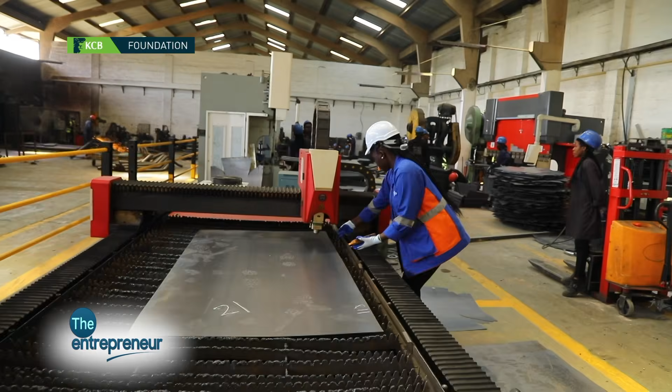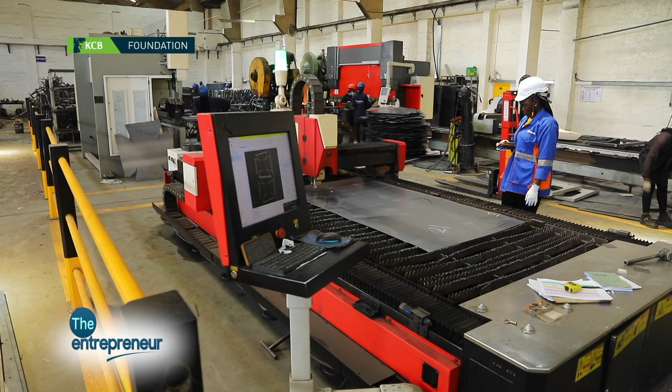Back then, when I was still a student in high school, we studied in a very different environment, and I wanted a passion, something very different and unique from what we knew. So after high school, I studied electrical engineering, and after campus, that is when I came to learn more about engineering. That is why I started majoring in the engineering side of fabrication.

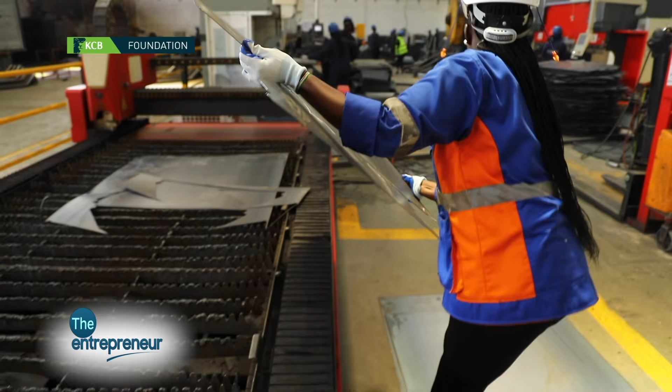After applying online through their website, I was shortlisted for an interview that was to be done at Protec. That is where we met with the KCB team that interviewed us. We did the necessary papers and questions, and after that we were shortlisted for a second interview before placement for the class.

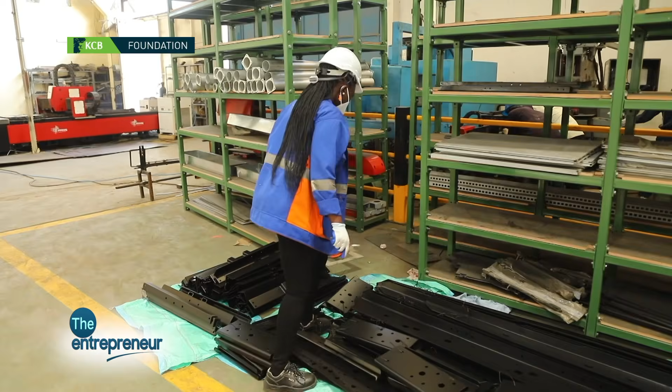We went for class. We were scheduled for 3 months of class and then 3 months of attachment or field work. So that is when I studied. We went for the 3 months class and studied very many things.

The classes actually started almost immediately after the interview, and they gave us the duty or timetable on how the classes would run. You had to be punctual, to know when and at what time you should be in class. So after that, in the next week, we started the class, the introduction, so you came to know about whatever you wanted to learn - the basic things, the PPEs to be used, all the necessary things to be done.

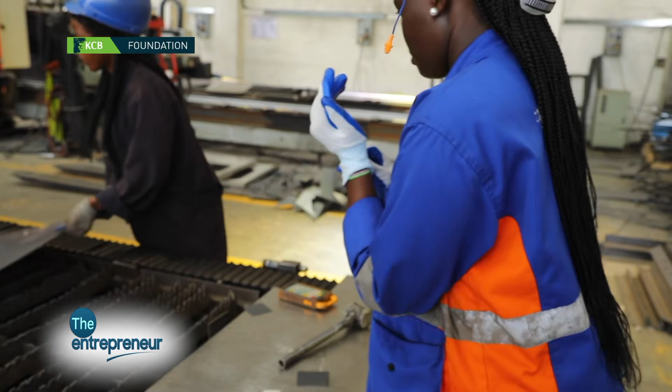For CNC, it is pure engineering. It is not hard, but it wants you to be determined. For that, you need to be passionate, you need to know whatever you want to do, because the field we are in is a bit gender biased. For a lady to venture into this work, it is very competitive.

For class, we had classes for practicals, so it is not a new thing when you are coming from an attachment. It is not new because in class you have already gone for practicals here and there - you already know the components of the laser, you already know the safety measures and precautions to be taken, and also whatever you need to do when there is an emergency.

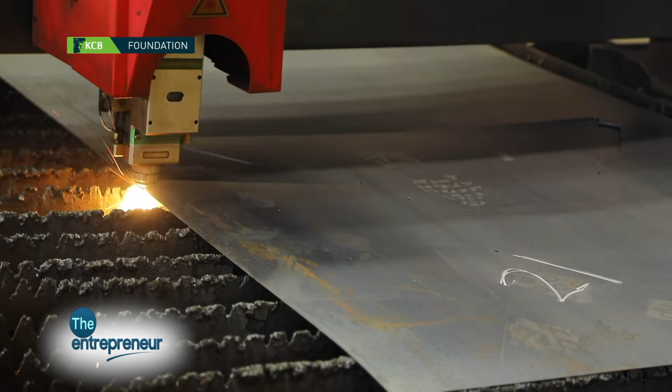But the good thing about CNC lasers is they have sensors. For example, at the laser, at the nozzle, there is a part at the bottom - when you touch it, it jumps, it has an alarm. So it can't cut a person, it will only cut the material, like there's a wood router or laser that only cuts metal.

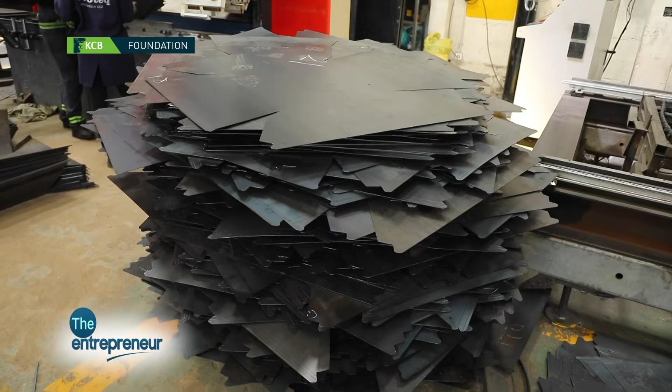For example, I did laser and plasma, but I majored in laser, CNC laser. CNC laser is a computerized laser, not the old kind. This is something that you can control from this panel.

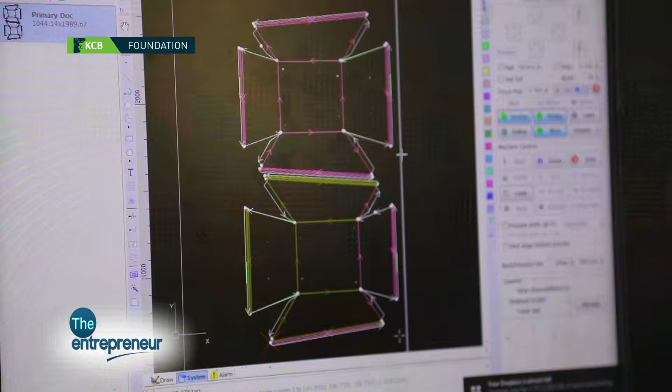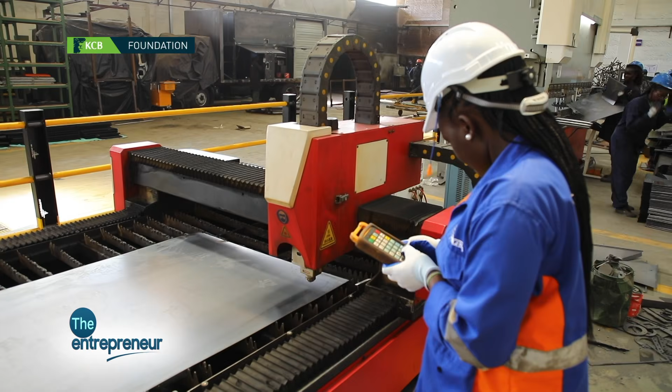And it will cut. The laser has a lot of things - it has a laser source, which is the main component, it has the nozzle, the rails, the chiller, the stabilizer. Those are the things that make up a laser. Also the motors - all the parts of the laser have motors at both sides.

So that was in theory. From then, in class, as much as we were going for practicals, that was just an introduction, seeing how the laser is. Just looking at it without touching, you have to understand it first. If you see it, you can be able to identify that this is a CNC laser, not the manual one.

For the classes, they would run during the week, but for proper understanding, and for people who wanted to know more, you have to create your own time for better understanding and to be able to capture it, because for the 3 months you go to class but you also need to generate your own time, dedicating yourself to understand. It is wide but not complicated, so to master something you need to create extra time to grasp anything that needs to be cut.

So after classes we did the exam. There is an exam after that. We did the exam, then immediately we went for the attachments. For me, I was placed at Protec, so I came to Protec.

I started as an attachee here at the laser. So that is when you come to practice whatever you learned in class. Yeah, so that is what it entailed.

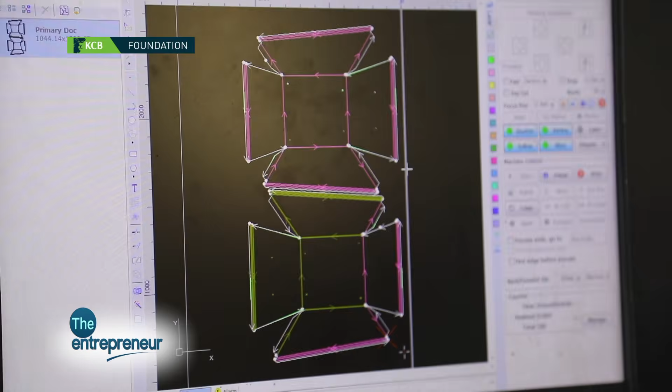But in detail, for the laser, we have the design, so how the process comes. After that, as much as we are given a bit of design, we learn about design, but the basics - the things that you can be able to do or use here. So we do the design a little, but I did mine with SolidWorks. Design is something I really love because it's my passion. After I started, I realized this is something I enjoy doing.

Design can sometimes be complex, sometimes simple, depending on client specifications. You can get a client who has come with a certain design, so you have to understand the design first, get a sketch, get all the right dimensions, and then we sketch. After you've done it on the computer and everything is okay and approved, then we send it to the next process, whether it's cutting, bending or fabrication.

My name is Joy Waroi. I'm a designer here at Protec Automation.

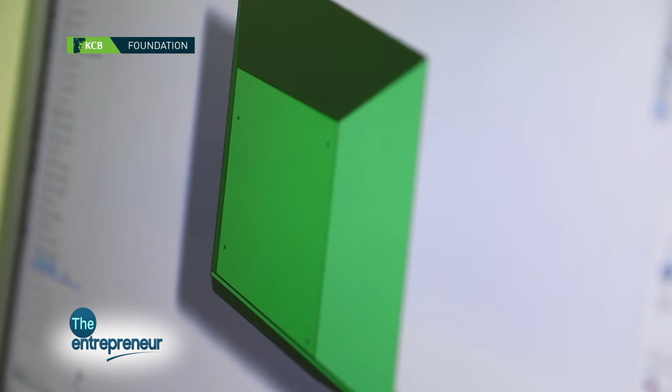I did agronomy in campus. After I completed, I went for a job, but I wasn't really satisfied because deep down I wanted something different. So at one point, my friend told me about the KCB Foundation, 2jiajiri Foundation, and sent me a link to apply, so I decided to try my luck. After I applied, I was selected, we went for an interview, then a 3 month course, then an internship, no, attachment, sorry. After that I got a job here at Protec because I was attached here. My boss decided it's okay to retain me because I had worked hard.

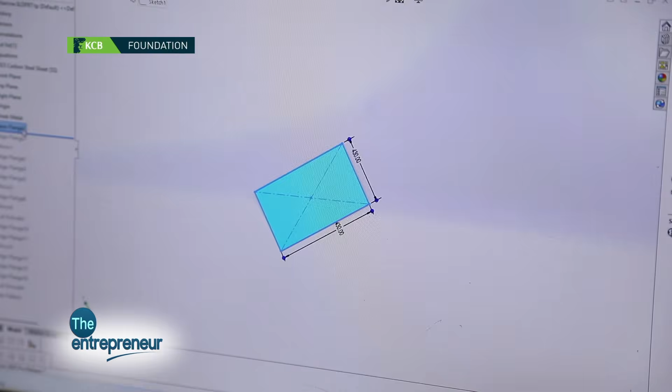So for example, if a client says they want to design something like wheelbarrows, this is what I do. We make sure we do our designs according to the client's specifications in terms of dimensions, the height, length and everything. Then once we do that, we make sure every stage of design is approved.

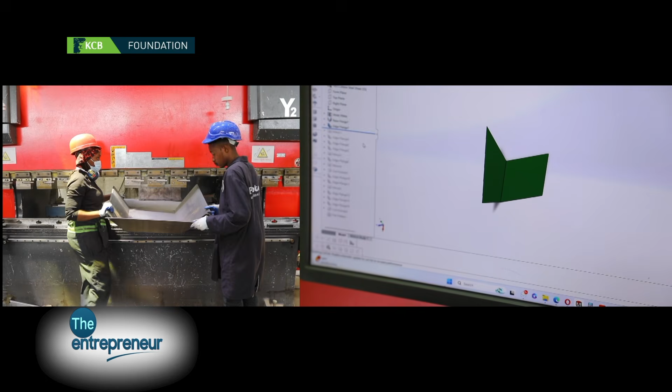Now as you can see, this is how it will appear step by step. Every stage must be approved and tested, maybe through prototyping, to make sure it aligns with all the specifications given by the client, to make sure there is no wastage of resources and materials.

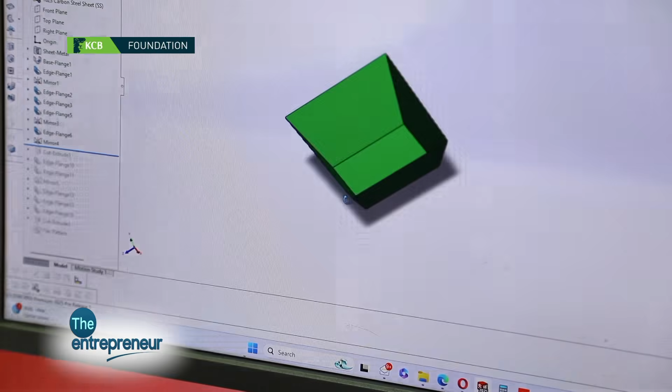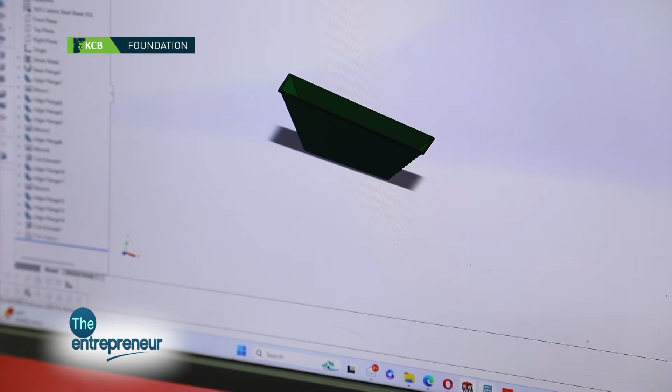And then finally we have this for the bowl, and then we have other parts. This is what we send to the next process because we cannot send it while folded. Once it is taken to the laser, it gets cut and bent, and once bent it becomes like this. So once it goes through fabrication, assembly and painting, this is what it will look like.

So after the design, you transfer the file you have designed from the design room or from the computer to the laser using a DXF form. There is a form that comes here, you transfer it here in DXF. So that DXF is what the laser can understand, that is the language with the laser. So when it comes here, when you open that file, the laser is able to run everything using the diagram in DXF form.

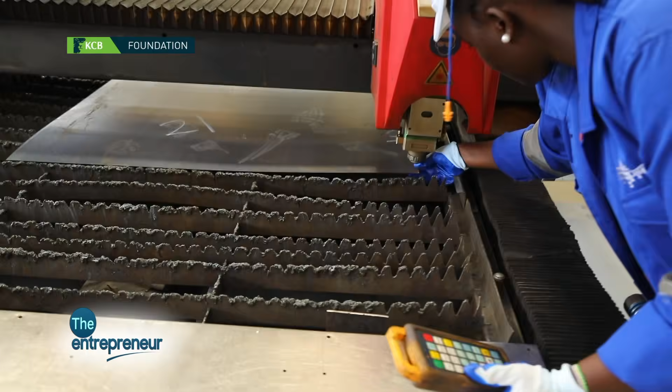So that's when you can start the preps for the laser before you cut. Before you lay the material, you have to inspect the machine to see if it's okay, you have to check the nozzle also. There are critical parts like the nozzle, there's a lens on the head too. Your lens can affect the cutting. So you should be keen on the parameters you use.

We call them parameters here. So you need to check first that the nozzle you're using is correct, because we have variety. There's mild steel and there's stainless steel. A nozzle used to cut stainless steel is not like the one for mild steel, so you have to change it. Also the thickness of the material matters. For lasers like these, a thickness of 4mm you cannot cut with a 3mm nozzle. Every thickness has its own nozzle.

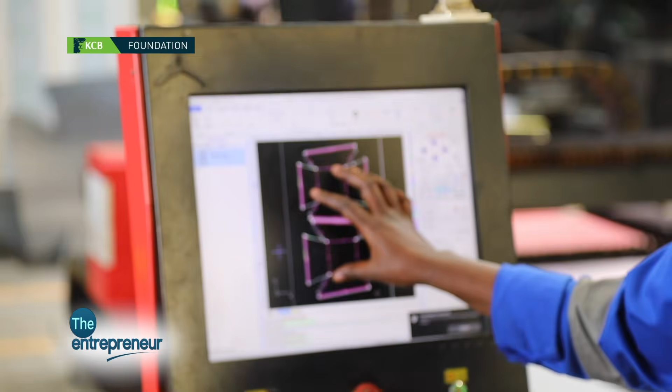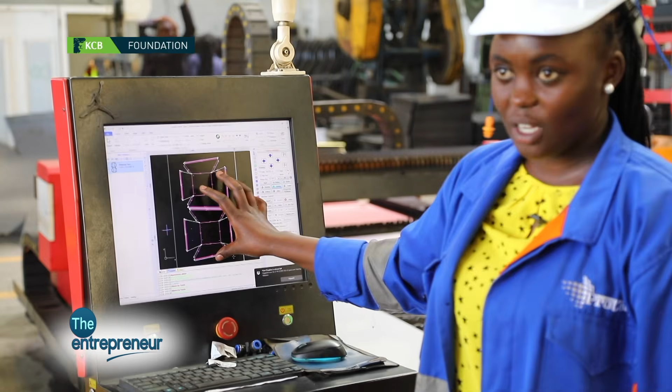Okay, after we receive the DXF form from design, it comes here, we open it as now it's a DXF form. So here now, for example, we are cutting the wheelbarrow bowl, because that's what we're cutting. So we take the materials, we place them here, we open the DXF here, which is here because it's already been sent from design. From here you do the necessary, you nest it as it's nested, you frame it. There are things that happen, there's framing, there's nesting, there's setting the reference points, those are all up here.

So you feed the correct information and then you go back to the workpiece. After that you have to frame it to minimize issues, because the laser cannot control where it cuts otherwise. You have to put the workpiece or the sheet in its correct place. You need to frame it, make it centered, don't let it sit badly because it can cut outside. So after you put the workpiece on the floor and everything is correct, set correctly, that is when you start.

You can either use this control panel on the screen, or we have also the machine remote, to help with movement. You have to inspect the parts being cut as you are cutting, because maybe something has gone wrong and it won't stop, so it won't run away for no reason. So you have to have a movable remote, you can control it from anywhere. You can pause, you can put an emergency stop if there is a problem.

The command the laser takes is from the DXF form. How it is designed is how it cuts. There are no alterations made, it's just that you can change some features that fit the laser, like parameters, so that it can suit whatever you are cutting. The thickness, you have to inspect the thickness, the nozzle you are using, the type of material you are cutting. Yeah.

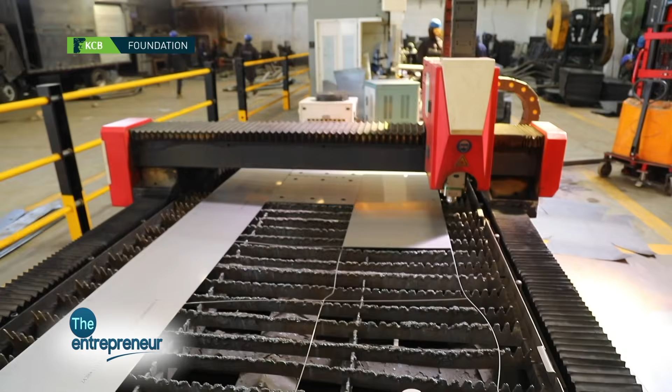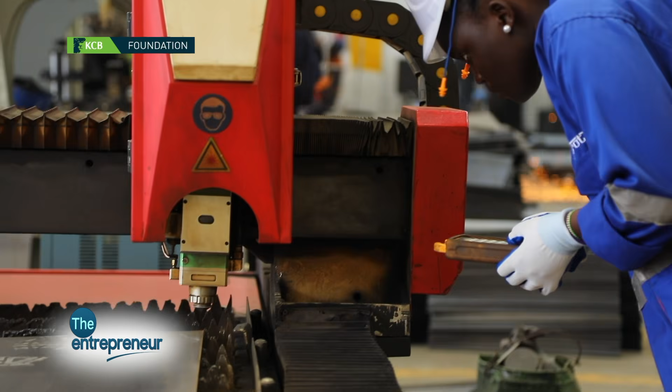It has sensors like these. These and that one are limit sensors. Also the one holding the Z-axis. This is the Z-axis, you see, this is the Z-axis.

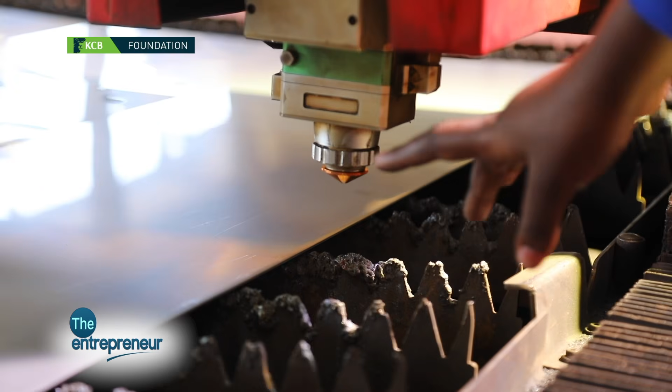What else? We have the motors that drive it, both. Also there are motors for this control panel down here. We have the laser source over there at the back.

Now that is what we call the laser head. Without the laser source, nothing can be performed. We have the stabilizer for the electricity, we have the chiller, and the remote is also part of it. We have gas - depending on the material you are cutting, that determines the gas you will use.

So after cutting, for example the wheelbarrow bowl, there are parts that the laser cuts and parts that get engraved. For the engraving, that is the useful part that bending uses, so bending will bend as per the engraving or the bending lines.

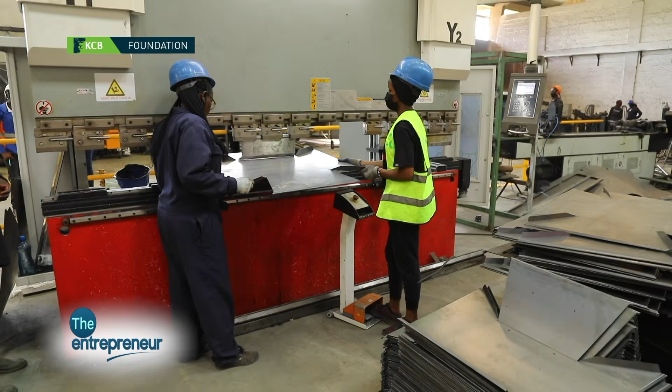The same way we are given the cut forms from the design, the design team also gives bending drawings, engineering bending drawings. So for the bending, they will understand the drawing using the bending marks - where there are angles, they will bend as per the angles on the drawing, the bending engineering paper. So that's where bending comes through.

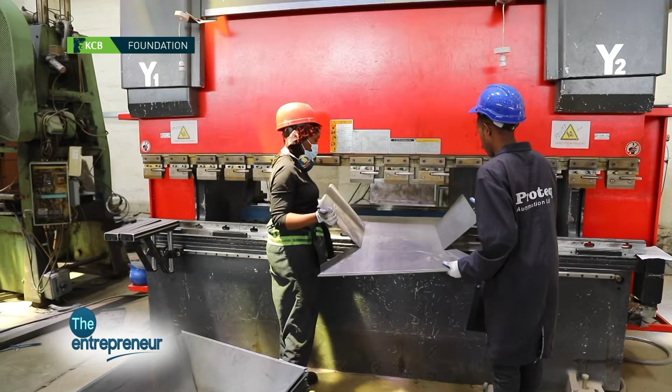Challenges in this field - definitely there are challenges. One challenge is this field is dominated by men. But it's interesting when a lady is here, you argue with them because this is what we are doing. It's not a soft job, it requires you to be tough, it needs passion and understanding.

Then other things are the engineering aspects. So you have to bring the engineering part into your mind, knowing that this and this is what is done.

But the interesting part of this is also that from a plain sheet, like a plain sheet, you can develop something useful in society, very useful. So you can take something like that wheelbarrow, and that wheelbarrow becomes something very useful that impacts people's lives - and most of the things we see, we made them there.

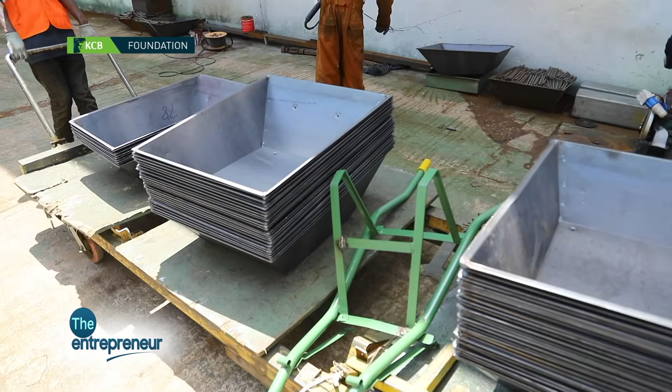So everything, most of the parts, even dustbins, those parts we make. Also for cars, we also make some parts. So it is very interesting.

It is actually satisfying when you know that if you see a car somewhere or you see a wheelbarrow, you know I'm behind it. Even if you see the whole process, you know my hands passed through here, or my mind was behind the design or the technical part of it.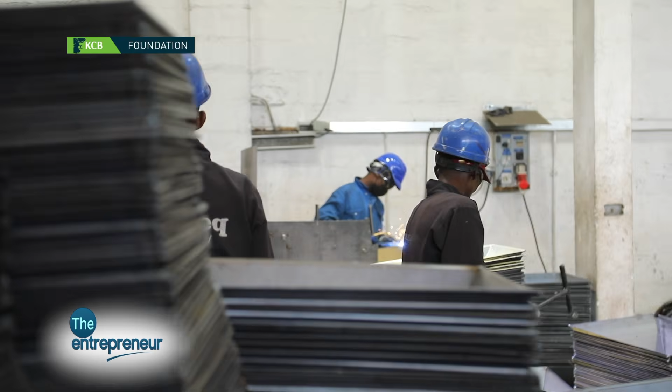So I'm encouraging the youth out there, even if you don't have anything, just study more - this is something you will come to start. Like us, even as we studied something else, we came all the way to here. You have a lot of people who studied very different things, but now we are here doing the same thing.

We are from different minds from outside there, coming into one team where you work with a common goal, so that at the end of this, once you finish design, I give it to laser, I give it to forming, someone else takes it to paint, and then the last consumer is the client - you see the client is happy, this is the work he or she ordered.

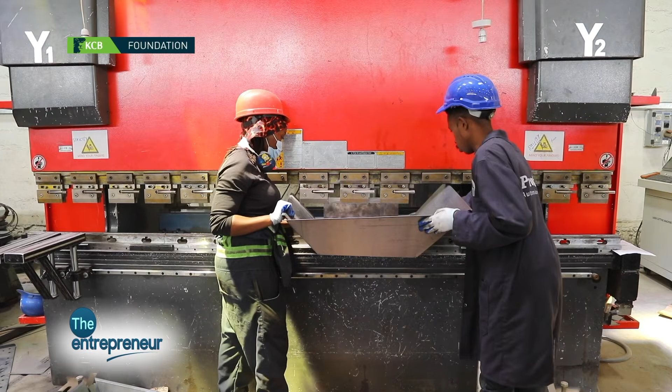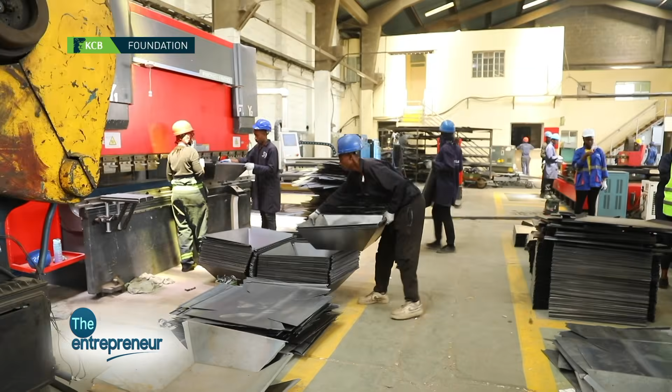KCB impacted positively in our lives because, if not for them, we would not be here, or I myself probably would not be here. Even because of them I get to study - we don't pay, they sponsor us. So we are sponsored, and they take care of us, they also come to make visits, you see.

Yeah, they are contributing, they are doing good work, because to sponsor someone fully for a course like this, more so in engineering, that is not easy.

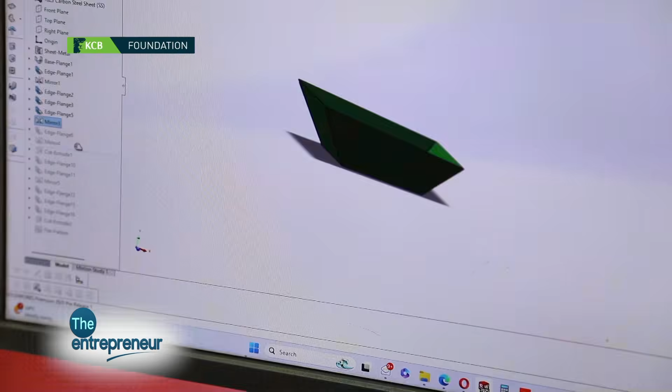The interesting part of this field is seeing something go from scratch to life, you see. It is interesting, by the way. I encourage people out there to do this.

Youth mostly, even if there are limitations, if you have the chance please do it, because it is life changing. You can be able to do a lot of things having this training. For example, for me it has given me a lot of opportunities - I now know a lot of things. It can pay my rent, it can give me food, instead of just staying home.

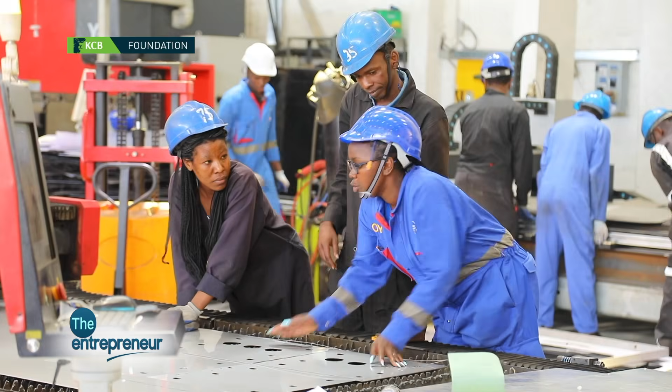It can also make you creative - you become creative in a way that you can create something, or you can see something from nothing, like the drawing becoming a real thing until it becomes something that helps. So the output is very satisfying, very good.

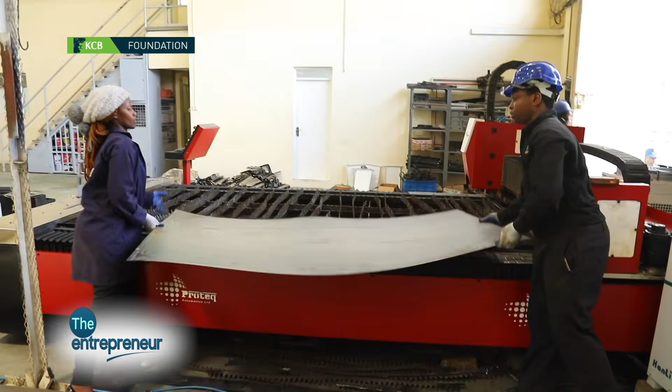I encourage all the youth out there to try to get the opportunity to apply for the KCB Foundation, because it helps. Personally, I can speak from my own experience that this thing is very fine, very interesting. So I urge all the youth to apply if it is possible - apply, get yourself a chance, and you'll learn a lot.